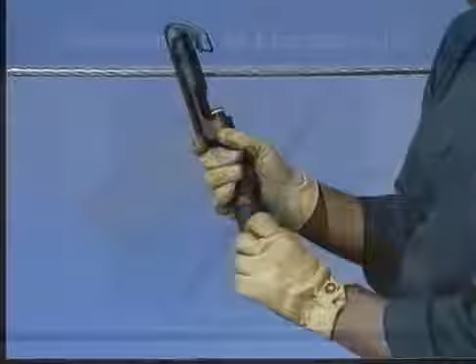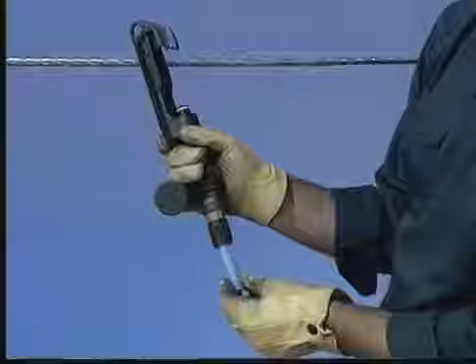To load the tool, select the proper shell for the application. Remove the breech cap from the tool, making sure the ram is retracted into the power unit. Insert the shell, keeping your fingers and thumb clear of the tool. Always load the tool in the vertical position. Grasp the coupling nut and tighten the breech cap assembly until it bottoms. Tighten the gas release knob. This prevents gas leakage and allows the piercer pin to penetrate the base of the shell.

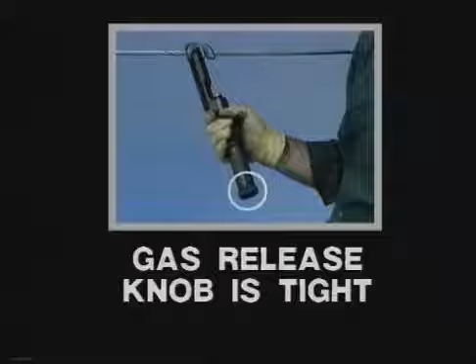After loading the tool, check the following three points before positioning the tool onto the connector. One, make sure that the ram is retracted; if not, remove the shell and repeat the loading procedures. Two, make sure that the breech cap is tightened. And three, make sure that the gas release knob is tight. After checking these points, the tool can be positioned on the tap.

To position the tap in the tool, the C-member must be located in the correct positioning notch with the open side facing the tool head. Turn the coupling nut until the power unit is seated firmly against the wedge.

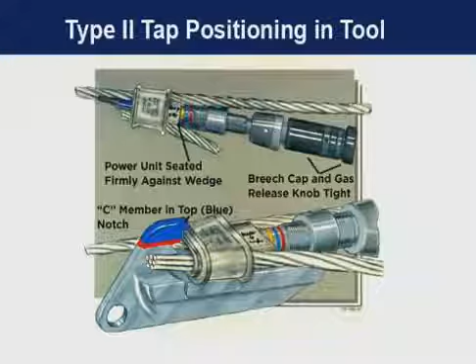When applying red-coated taps, the auxiliary platform must be used. Blue-coated taps do not require a platform. Type 2 taps are color-coded white and also do not require the auxiliary platform. The C-member is positioned in the blue notch of the tool head. If the tool is correctly positioned on the tap, it should be self-supporting.

Before firing the tool, check the following points. One, make sure that the connector is properly positioned in the tool. Two, make sure that the power unit is firmly seated against the wedge. Three, the breech cap must be tightened. And four, check that the gas release knob is tight. After checking all these points, the tool is now ready for firing.

Although the tool is self-supporting, you can steady it by holding the breech cap assembly. The tool is fired by striking the gas release knob with a sharp blow from a hammer. Be sure to stay clear of the hammer and tool when striking.

To release the gas, turn the gas release knob counterclockwise. Hold the tool away from your body as the gas is released. If the gas does not escape, close the gas release knob and hit the tool again. Then release the gas. To detail what just happened when the tool was fired, the top illustration shows that the

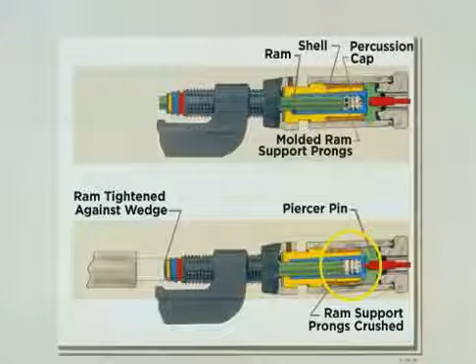Safety prongs prevent the firing pin from contacting the primer. The safety prongs were crushed by hand tightening the coupling nut, which firmly seated the ram against the wedge. During firing, expanding gases caused the ram to force the wedge into the C-member. The retracting piercer pin allowed the gases to escape.

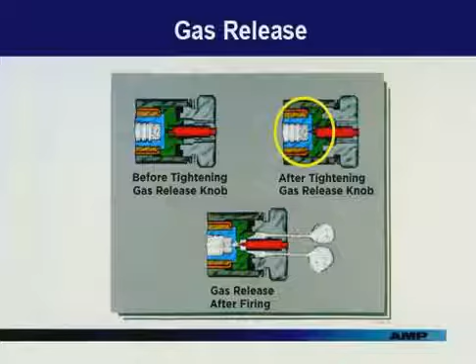This cutaway illustration explains in detail the gas release action. Before tightening the gas release knob, notice that the piercer pin is away from the shell. After tightening the gas release knob, the pin has pierced the base of the shell and remains in this position during firing. After firing, by turning the gas release knob, the pin is retracted, allowing the gas to escape.

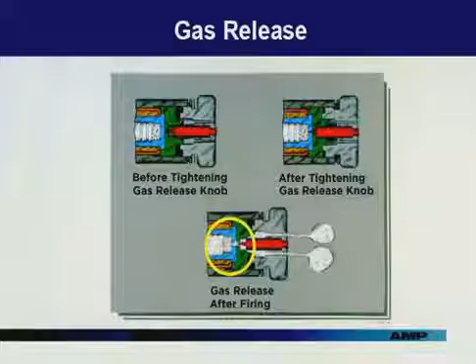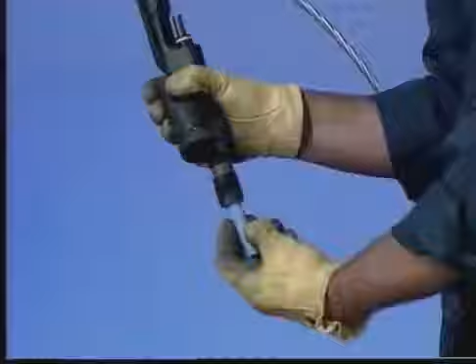Remove the tool from the tap by turning the coupling nut until the tool can be removed. Grasp the coupling nut and turn the breech cap assembly and remove it from the tool. Pull down on the ejector sleeve to eject the spent shell. Make sure that you always point the tool down and away from anyone before ejecting the shell. Replace the breech cap assembly after shell removal.

If for some reason the spent shell cannot be removed from the breech, replace the breech cap and return the tool to your AMP representative for repair.

When installing yellow-coated taps using the large tool head, check the position of the yellow-coated band on the power unit. This yellow band must be adjacent to or in front of the yellow indicator on the side of the tool. If these bands do not align, check your wire and tap combinations.

After firing the yellow shell, wait approximately 10 seconds before releasing the gas. This will allow time for the plastic shell casing to harden after the high temperature of firing made it soft.

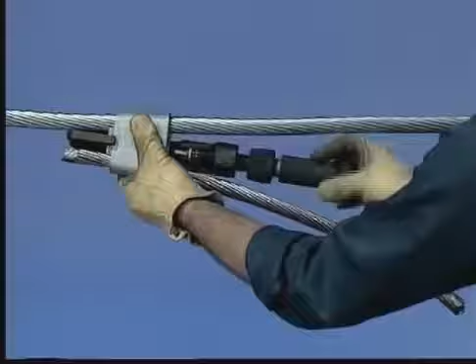All installed Ampact taps should be visually inspected for a locking tab feature. This visual indication ensures a good connection has been made.

Here are some of the safety precautions for you to follow after firing the tool. If the gas does not release, retighten the gas release knob and strike the tool again with a hammer. If the gas still does not release, make sure your fingers are away from the ram area. Point the breech toward the ground and twist a screwdriver between the ejector sleeve and breech threads.

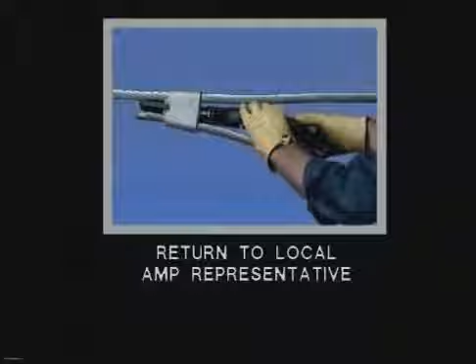When you do not get a gas release, always check the breech for a dislodged primer cap. Also check the piercer pin's length because it may not be long enough to pierce the shell wall. Never remove shells with pliers or by prying under the shell lip. If the shell cannot be ejected, contact your local AMP representative.

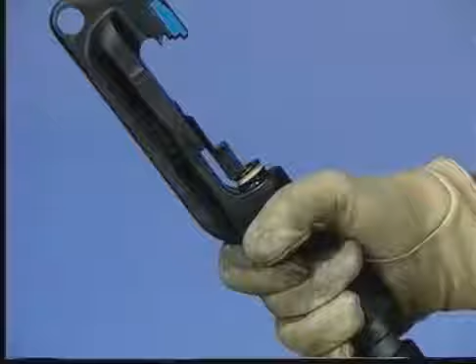To remove an installed tap, select the correct takeoff clip. Retract the power unit and install the takeoff clip by slipping it over the head of the tool. All takeoff clips are installed in the same manner.

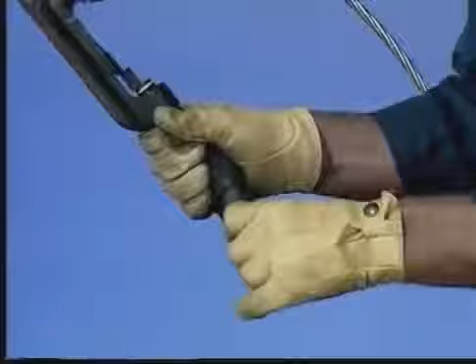Next, load the tool with the correct shell for removal. Always step down one shell color for tap removal. For example, if you install with a yellow-coated shell, use a blue shell for removal. If you install with a blue shell, you remove with a red shell. If you install with a red shell, you must use a red shell for removal because it is the smallest. Never use a yellow shell for removal because the charge is too powerful.

Once the clip is positioned and the tool loaded, position the tool with the open side of the C member facing away from the platform. Tighten the power unit so it fits snug against the pusher block on the takeoff clip. The shoulder of the takeoff clip must butt against the C member. The tool is now ready for firing.

Strike the breech cap with a hammer. Turn the gas release knob to vent the gas. Then turn the coupling nut on the power unit to remove the tool from the connector. Remove the tap from the line to complete tap removal. Notice that the conductor is not damaged by either installation or removal of Ampact taps.

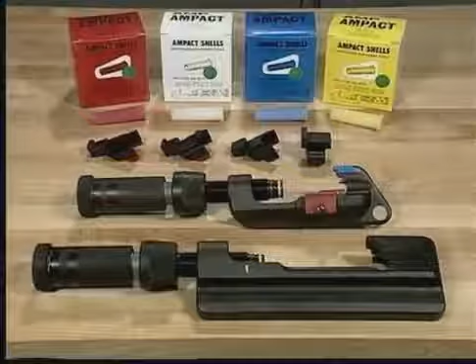This completes Module 1 of the Ampact Tap System Training Program. For additional information on the Ampact Tap System application and tooling, refer to the AMP Customer Manual, CM 2106.

Module 2 of the Ampact Tap System Training Program will highlight tool maintenance. Ampact tools are designed to provide years of safe, reliable operation. Like all mechanical equipment, Ampact tools require regular inspection and maintenance to extend the life and reliability of the tool. Careful performance of daily and weekly servicing is, however, the responsibility of the user.

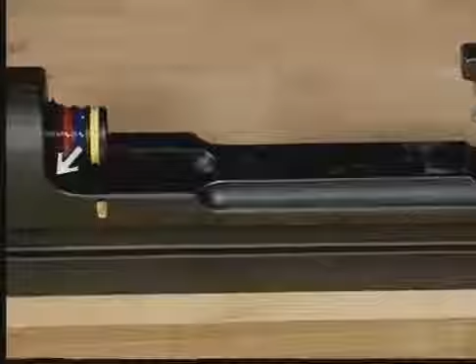The following preventive maintenance items should be checked daily. Visually inspect the stress areas of the tool for nicks and scratches because they reduce the fatigue life of the tool. Also check the lance at the front of the tool. This lance should not be bent. Inspect the threads on the coupling nut for damage. Any part of the tool that has been burned from cross-phasing must be returned to AMP for repair.

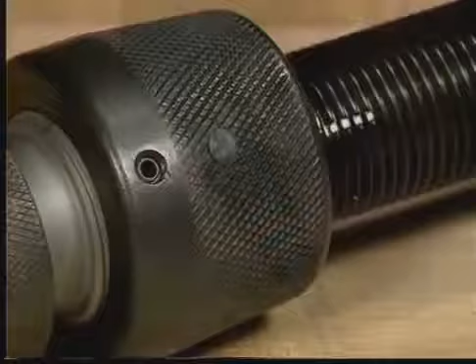For operator safety, AMP has designed into the Ampact tool a failsafe. To inspect for a broken failsafe, both the pin and set screw must align with the white painted slot on the threads. All three must be in alignment to assure an unbroken failsafe. If they do not align, the failsafe is broken.